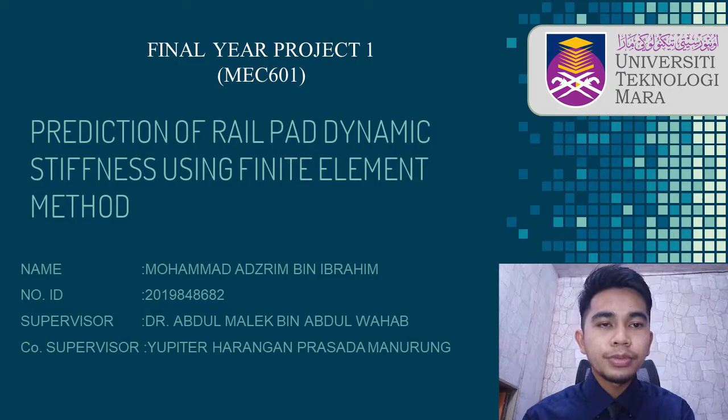Next, the summary of the project. The fastening system has a crucial role in the railway system as it provides support to the rail track. Rail pads are commonly used between the rails and the sleeper that provide flexibility to the track and dampen the transmission of noise and vibration to minimize these consequences. The service conditions such as temperature, frequency, and toe load affect the nonlinear dissipative characteristic of this material.

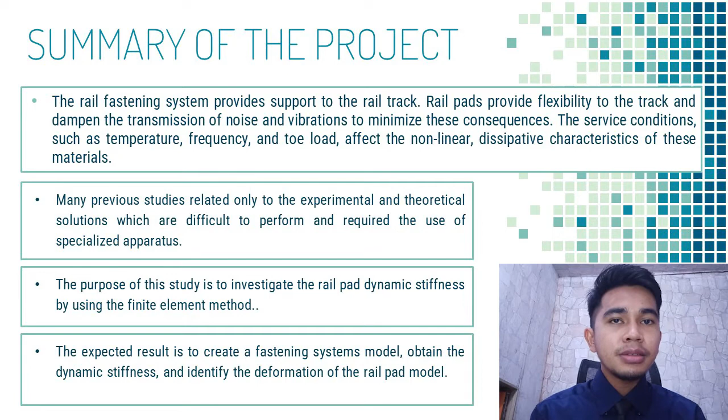Many previous studies related only to the experimental and theoretical solution, which are difficult to perform and require the use of special equipment. Therefore, the purpose of this study is to investigate the rail pad dynamic stiffness using the finite element method. The finite element method is a well-known technology in scientific computing that is used mostly to solve engineering problems. The expected result is to create the fastening system model, obtain the dynamic stiffness, and lastly, identify the deformation of the rail pad itself.

Next, the introduction. The use of elastic rail pads can effectively reduce wheel or rail interaction, slow down ballast pulverization, and reduce railway maintenance costs. The dynamic stiffness is important in order to identify the performance of the rail pad as well as describing the elastic and viscous properties. The alternative in order to identify the dynamic stiffness of the rail pads is by using the finite element method, FEM analysis.

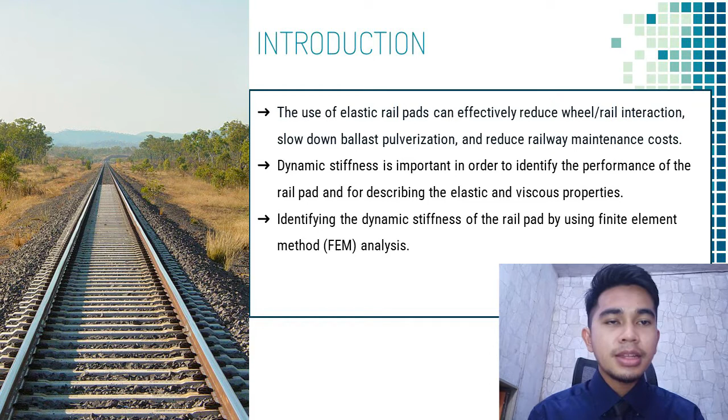Next, we move on to literature review. There are several studies or research related to this project, which is the dynamic stiffness of the rail pad using finite element method. The first point is the rail pad stiffness. According to Sainz-Aja in 2020, the study discovered that variables such as temperature, frequency, axle load, and toe load have an important influence on the stiffness of rail pads.

According to Wei in 2018, the results indicate that the storage stiffness and loss factor of Vossloh 300 rail pads increase with the decrease in dynamic load or the increase in preload within 0.1 until 10,000 Hz at 20 degrees Celsius, and basically linearly increase with frequency in a logarithmic coordinate system. The second point is the rail fastening system. According to Sadeghi in 2020, this study discovered the difference between the results from the linear and nonlinear model of the rail web fastening system as well as the rail foot fastening system.

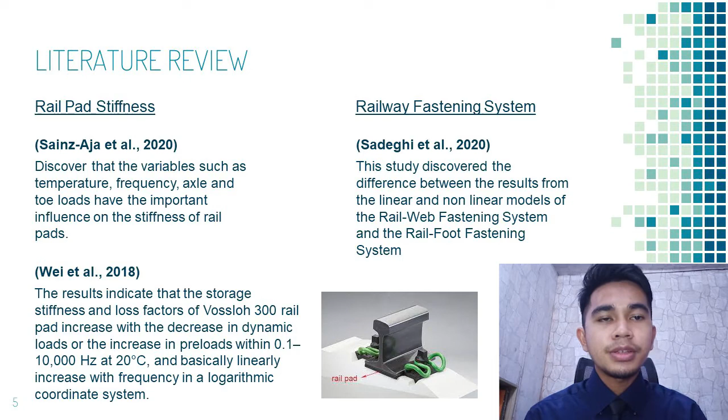Next point is the finite element method. According to Chen in 2014, the validated finite element model is used to analyze the sleeper and fastening system under different loading scenarios involving various vertical and lateral load combinations. Both component stress and system deflection of the model are analyzed to investigate the performance at the component and system levels. According to W. Li in 2015, the rail support can significantly affect rail dispersion and frequency response below 1 kHz using the semi-analytical finite element method.

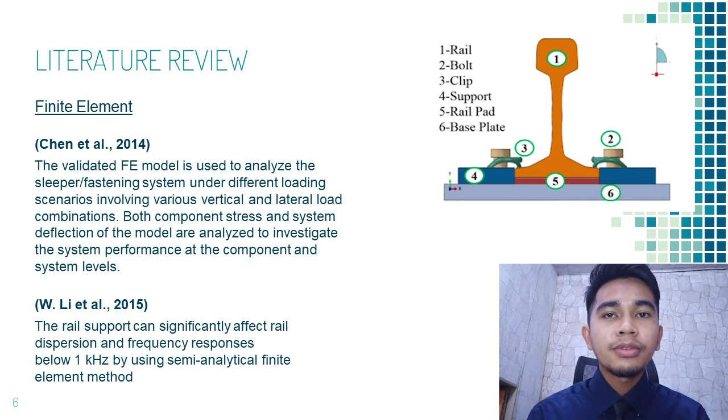Now we move on to the problem statement and objective. Most of the studies performed in order to identify the dynamic stiffness of the railway fastening system are conducted by experimental and analytical methods. These studies do not indicate the overall view of the rail pad's behavior and are difficult to perform because the experiments require the use of special equipment. Thus, the finite element method is needed to see the overall view of the specimen, easily model complex geometry and irregular shapes, and also be accurate in solving the problem.

The objective of this study is to develop a simplified fastening system model under operation. Second, to investigate the dynamic stiffness characteristic of the rail pads under different changing parameters.

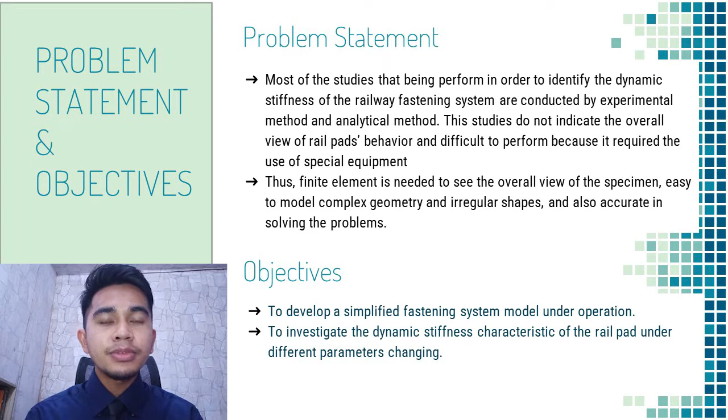Next, we move on to the scope and limitation of this project. There have been numerous previous studies on the dynamic stiffness, particularly using the finite element method to solve the problem. This study involves vibration, strength of materials, and also the simulation method. There are also limitations of this research, such as being only conducted in computer software using the finite element method and a software model.

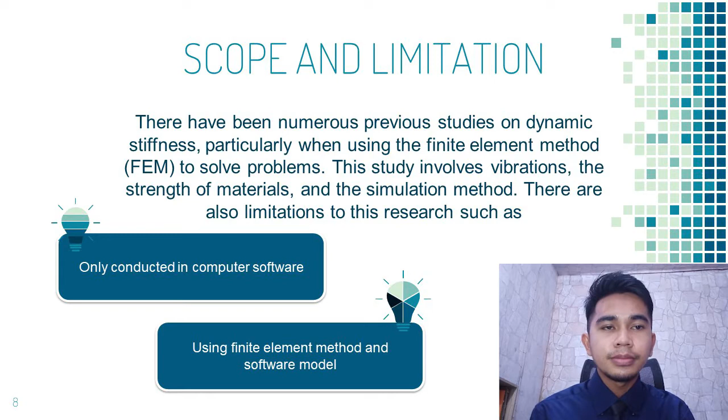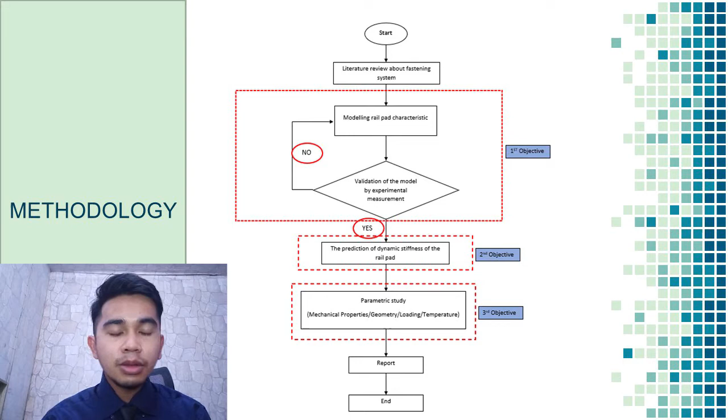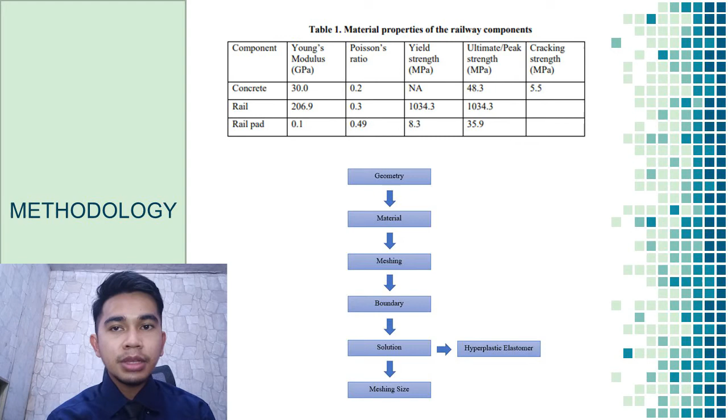The first process is the geometry, which is the model. Second is the material that we apply to the model. Third process is the meshing. The fourth process is the boundary condition, where we apply force and fixed position. And lastly, the solution, which consists of two things, the hyperelastic elastomer and the meshing size, in order for us to get a better result.

Lastly, we have the equation of the dynamic stiffness. K represents the dynamic stiffness, F represents the average force, maximum and minimum, and D stands for the displacement, average displacement, maximum and minimum. The deformation can be obtained from the simulation itself.

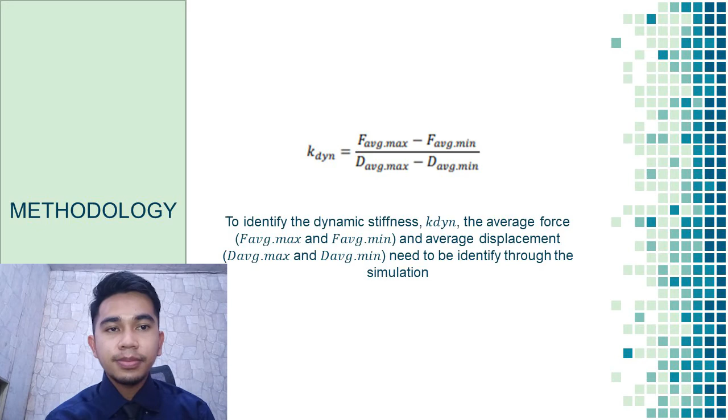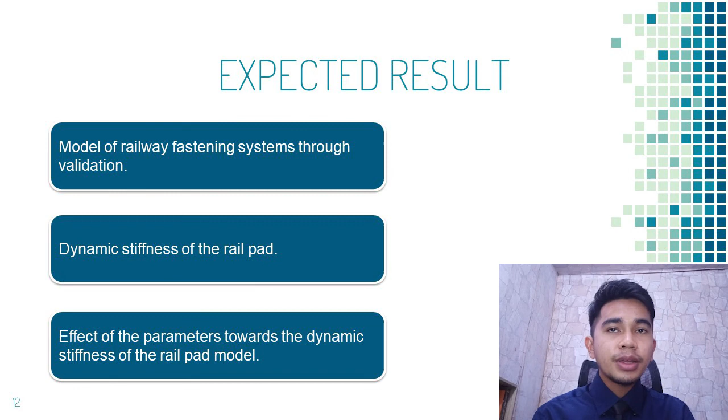Next, we move on to the expected result of this project. The expected result of this research can be summarized as follows: identifying the model, recreating a model of the rail fastening system through validation, determining the dynamic stiffness of the rail pads by using simulation, and determining the effect of parameters on the dynamic stiffness of the rail pad model.